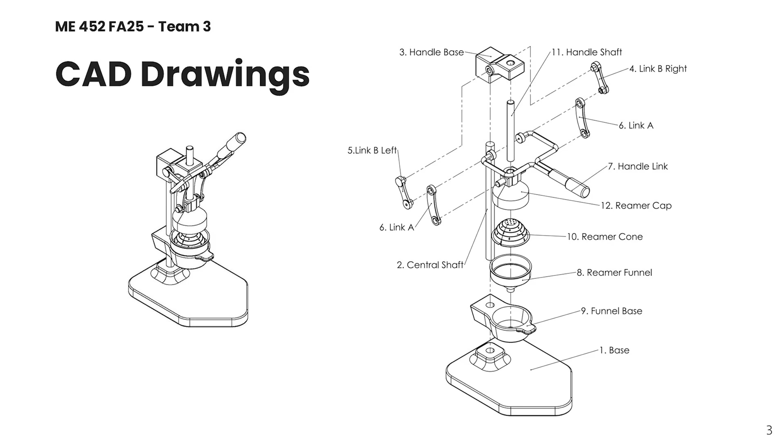For our primary customers, we have small businesses such as cafes, bars, juice stands, and restaurants, as they may use juice presses daily. Small businesses may value cheaper mechanical presses as opposed to more costly and complex presses, such as alternative electrical options like larger businesses may prefer. For our secondary customers, we have home users such as families and parents, as well as health-conscious individuals who may use presses frequently and prefer simpler, cheaper mechanical presses. Additionally, travelers and campers are customers as they may not have access to electrical solutions but value fresh juice.

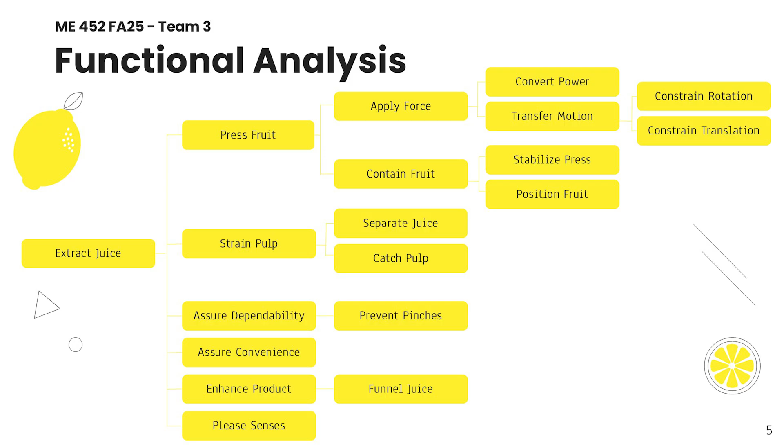The primary function of a juice press is to extract juice. This has subfunctions of press fruit, strain pulp, assure dependability, assure convenience, enhance product, and please senses. Press fruit has subfunctions of apply force and contain fruit. These both have their own subfunctions of convert power, transfer motion, and stabilize press and position fruit. Transfer motion has its subfunctions of constrain rotation and constrain translation. Strain pulp has subfunctions of separate juice and catch pulp. Assure dependability has a subfunction of prevent pinching, while enhance product has a subfunction of funnel juice.

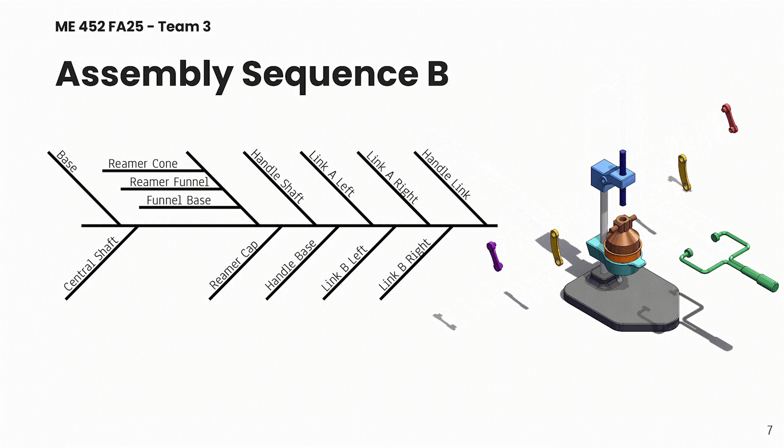Now looking at assembly sequence B, this approach follows a bottom-up method, starting again with the base and finishing again with the handle link, but it changes the order of assembly components to improve alignment and reduce joining difficulties. By assembling certain parts earlier, such as the reamer cap, parts are easier to locate and fasten later in the process. Overall, Sequence B enhances part accessibility and reduces the number of adjustments required during assembly.

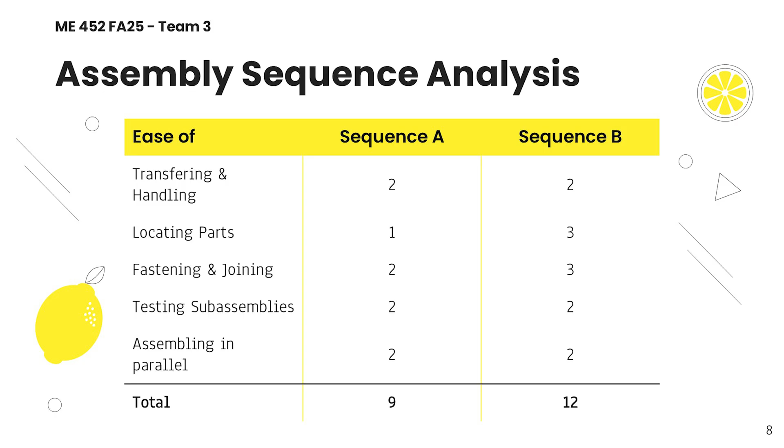Finally, this table compares the two sequences using 5 key criteria. As shown, Sequence B outperforms Sequence A in both locating parts and fastening and joining, scoring 3 out of 3 in those two categories compared to 1 and 2 for Sequence A. The other categories, transferring and handling, testing subassemblies, and assembling in parallel, remain consistent between both sequences. In total, Sequence B achieves a score of 12, while Sequence A scores 9, confirming that Sequence B provides a more efficient and effective assembly process overall.

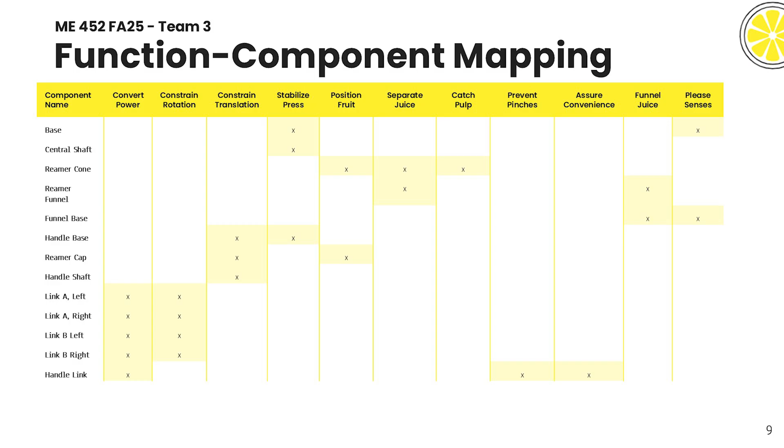Using our component list from the fishbone diagram and the functions from our FAST diagram, we built a function component matrix linking each part to its purpose. The linkage system is the core mechanism. Its links control rotation and its shafts control translation, converting handle force into the downward press that extracts juice. The base, central shaft, and handle base form the main structure, adding weight and stability. The reamer cone and cap hold the fruit, while the cone and funnel separate and collect pulp. The handle link improves ergonomics and prevents pinching, and the funnel base and base guide the juice down and give the press a stable, balanced feel.

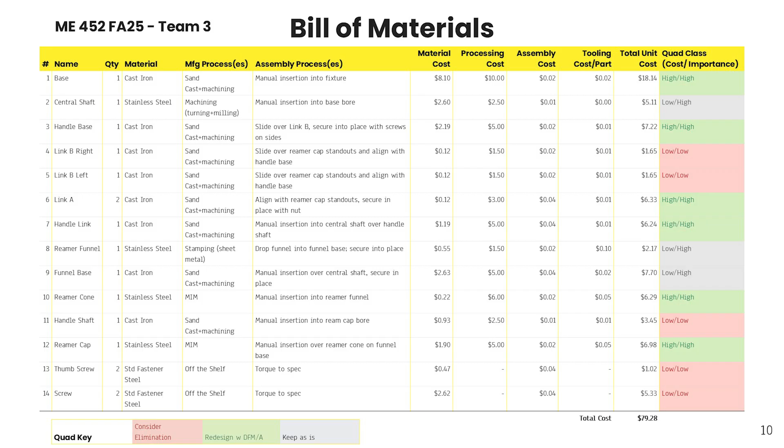Now we will discuss product family design. For this, we compared the functions on our FAST diagram with our primary and secondary customer groups to determine what would be different. We determined 2 different functions would be different: catch pulp and assure convenience. This is because the primary group will be using the juicer for longer extended periods of time. To help with this, we wanted them to have the ability to collect more pulp in the reamer funnel without having to empty it every few uses. And we also wanted a redesign of the handle link to a more ergonomic design that promotes extended use. So the 2 main modules this refers to are the reamer funnel and the handle link.

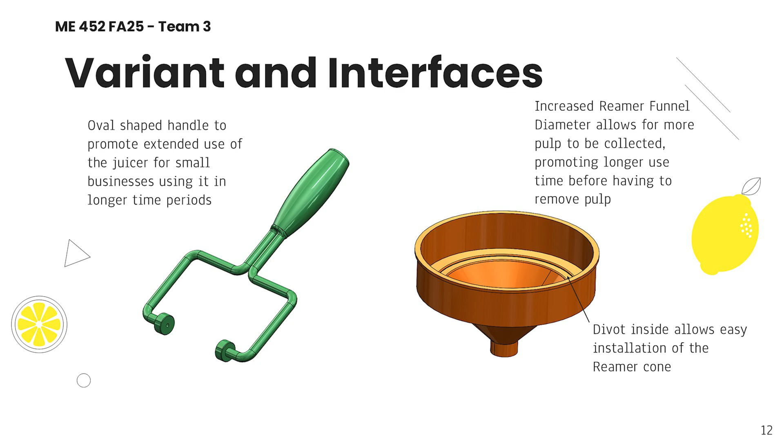The next slide shows the variant changes. The first variant involves the redesign of the handle with an oval shape at the end. This allows for a more comfortable grip for the user. The second variant is a larger reamer funnel to allow for more pulp to be collected, promoting longer use before having to remove the reamer funnel to dispose of the pulp. The main change is a larger diameter cone on top of the funnel.

For assembling the different modules, this is the same for both variants. For the handle link, it has the same attachment as before, where it connects to link B on both sides. For the reamer funnel, it has the same placement in both variations, with the reamer funnel sitting on top of the funnel base. There is no worry over displacement of the reamer funnel when it is installed because the funnel shape on the bottom of the part is the same in both variations, making locating of the part position simplified.

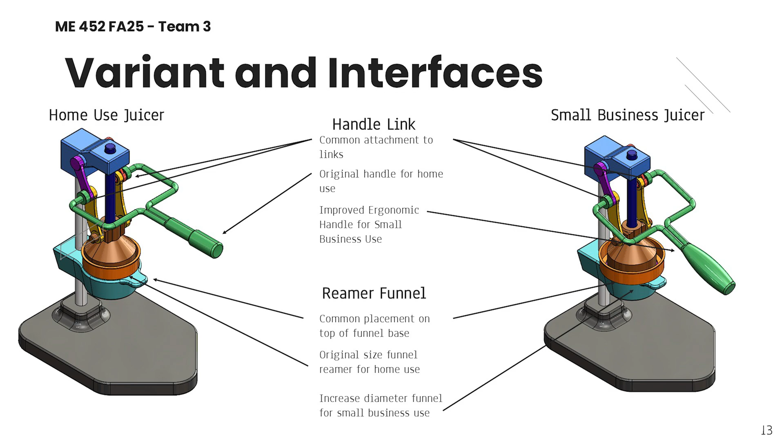Inside the larger reamer funnel is a divot to help place the reamer cone. This is slightly larger than the diameter of the reamer cone, making it easy to find the part location for installation. Lastly, the assembly sequence of the original design can be modified so that the variant parts are assembled towards the end, which ultimately will decrease assembly complexity while saving time and money.